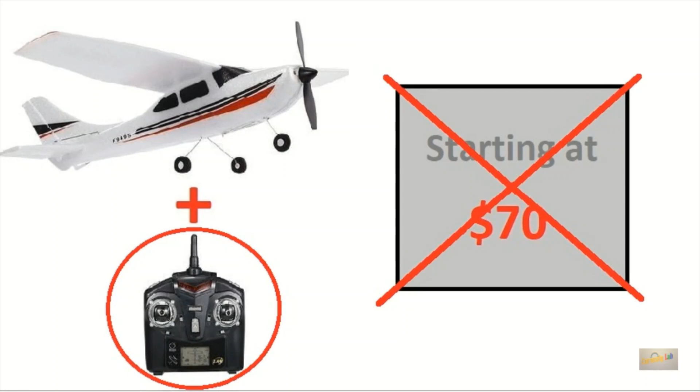If you try to buy the most affordable 4-channel RC plane, it starts around $70. Even making one is costly because of the price of remote control. But what if I tell you that you don't need to spend that amount of money on an RC plane?

It is possible to make a 4-channel RC plane for just $20, including remote controller. Can you imagine? We can get all necessary components required for an RC plane, including remote controller, in each and every cheap drone available easily for just $20. But the reality is, drone and RC plane are completely different things.

So you must be thinking, why should I convert a drone into an RC plane? And even if I want to, how can I do that? Let me answer these questions one by one.

First, why should we convert? You all will agree flying both drone and RC plane is great fun, but every individual has a different choice of hobby. So if you are an RC plane enthusiast like me, this can be really cost effective and great fun for you. We love experimenting with our hobby, and the design idea is so elegant that it's worth a shot.

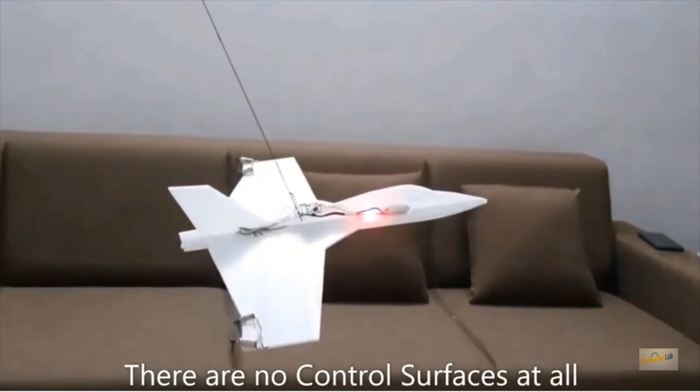While experimenting with my previous project, I got this unique idea of converting a cheap drone into an RC plane. Immediately, I tried my best to search if anyone had done this.

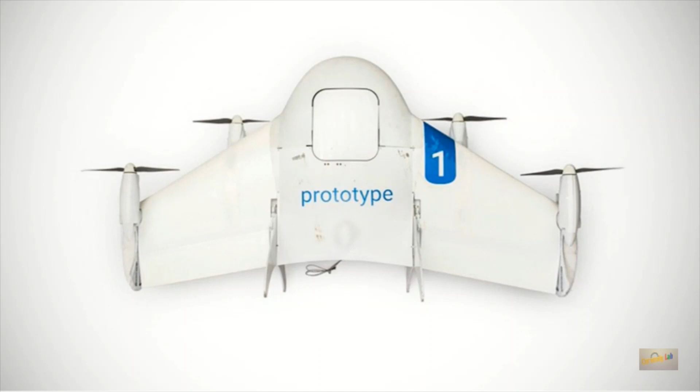Surprisingly, what I found is this Swan H-Wing and this Project Wing from Google use a similar design with VTOL capabilities, but they are entirely designed from zero with all necessary hardware and software, which is not an easy task for an individual hobbyist. Of course, some people have tried to convert a drone into a 2-channel RC plane, but nobody, literally nobody, has converted a drone into a 4-channel RC plane.

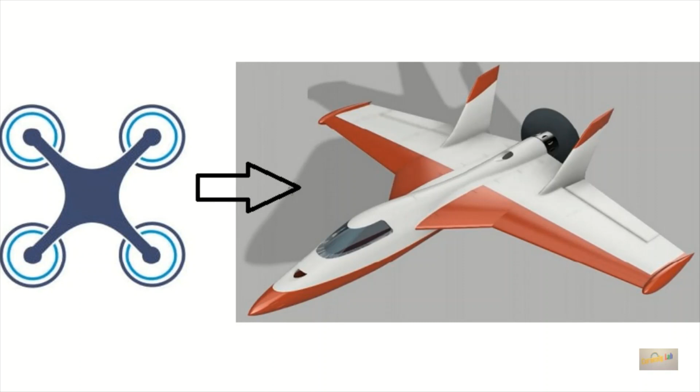Now, let's move to part 2, how to convert it. Let's begin with the basics of drone maneuvering briefly.

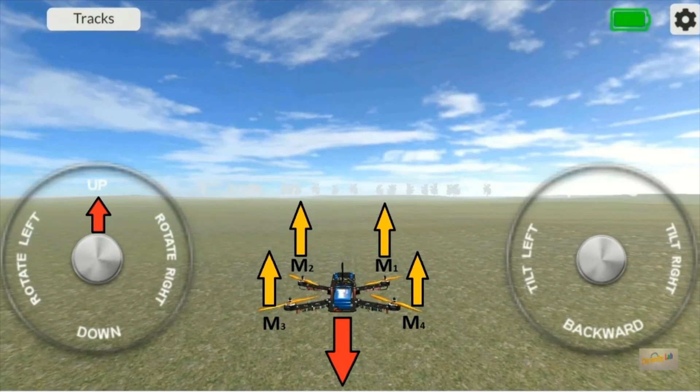When we move the throttle stick up, all four motors will increase thrust. As the total thrust is more than weight, the drone will start rising. Similarly, when we move the throttle stick down, all four motors will reduce thrust, and as the total thrust becomes less than weight, the drone will start descending.

When we move the pitch stick forward, the two rear motors M3 and M4 will produce more thrust than the two front motors M1 and M2, so the drone will pitch forward and also start moving forward. When we move the pitch stick backward, the two front motors M1 and M2 will produce more thrust than the two rear motors M3 and M4, so the drone will pitch backward and also start moving backward.

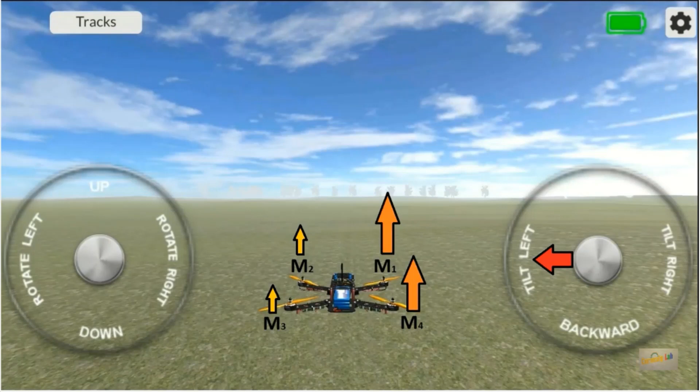When we move the roll stick left, the two right side motors M1 and M4 will produce more thrust than the two left side motors M2 and M3, so the drone will roll left as well as start moving left. When we move the roll stick right, the two left motors M2 and M3 will produce more thrust than the two right motors M1 and M4, causing the drone to roll right and move right.

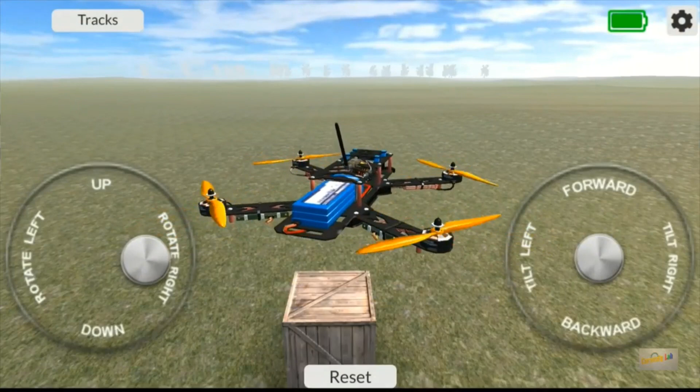When we move the yaw stick left, the two clockwise motors M2 and M4 will produce more thrust than the counterclockwise motors M1 and M3, so the drone will take a left turn due to counterclockwise unbalanced torque. When we move the yaw stick right, the counterclockwise motors M1 and M3 will produce more thrust than the clockwise motors M2 and M4, and the drone will take a right turn due to unbalanced clockwise torque.

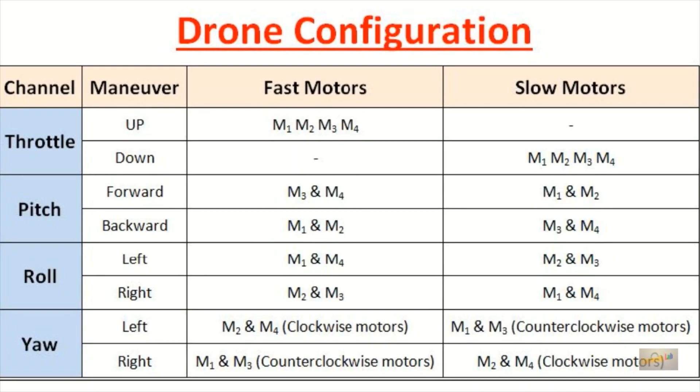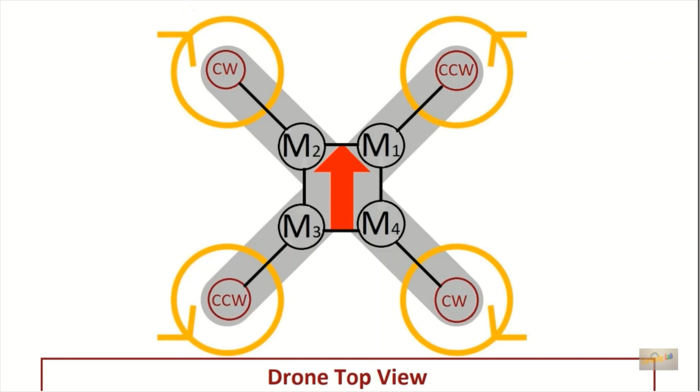This is the final concluding truth table for control inputs and respective motor outputs. I tried all combinations of motor configurations so that the same controls can be used for the RC plane also, and found this best suited configuration. This is how the motors are connected on the drone, where M1, M2, M3 and M4 are actually positions on the flight controller where motors are connected.

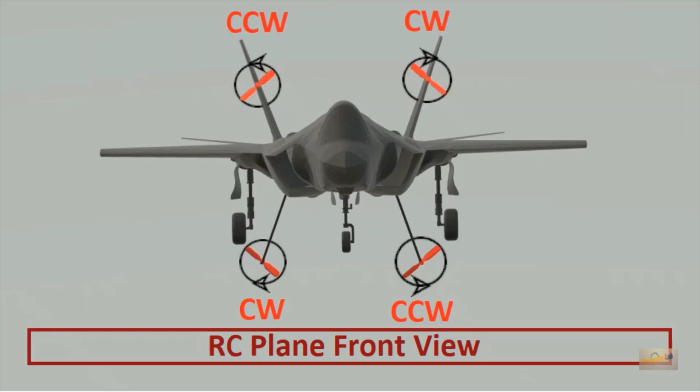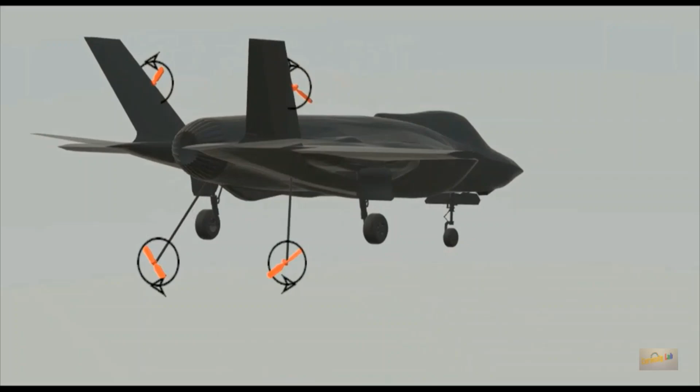Motors are mounted for horizontal thrust configuration, exactly as shown in this front view of the RC plane. But as you can see, motors are not exactly horizontal. They are at 20 to 30 degrees with horizontal to keep the line of action of thrust away from center of gravity, making controls more sensitive.

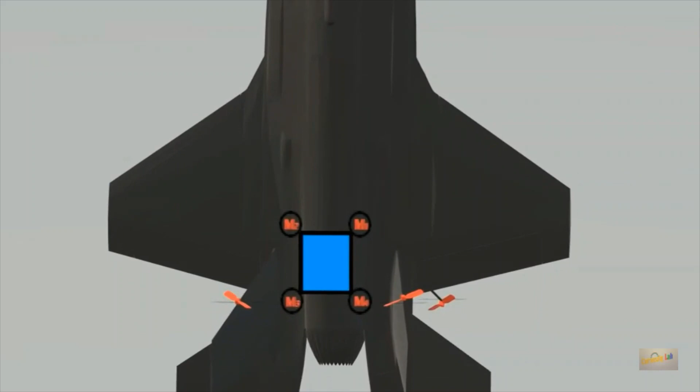Now let's install the flight controller on this plane. The flight controller from the drone is installed exactly the same way as the drone, perfectly parallel to the airplane fuselage. Now let's see the most important part, connections of motors with the flight controller.

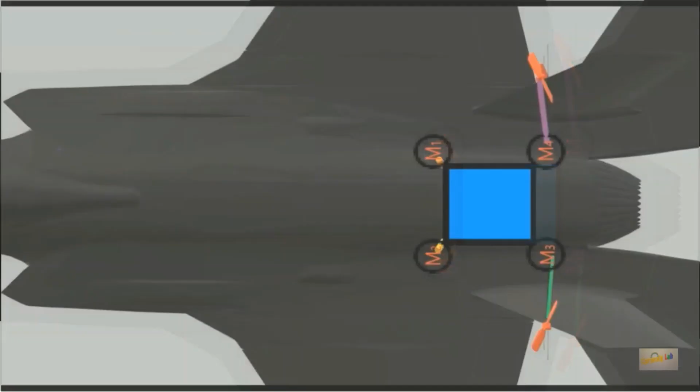Two upper motors on the airplane are connected to the flight controller where motors M3 and M4 were connected in the drone, as shown in the diagram. Now let's see the connection of the lower two motors with the flight controller.

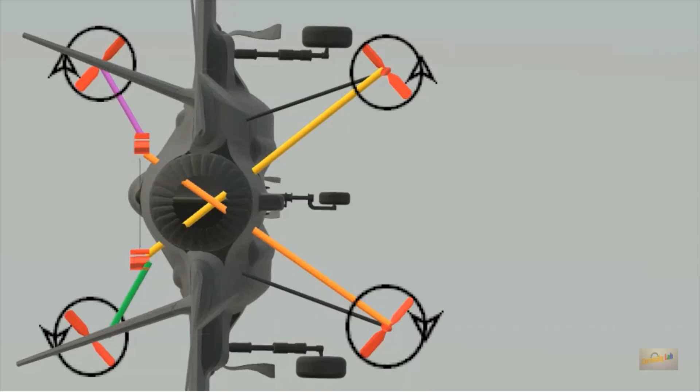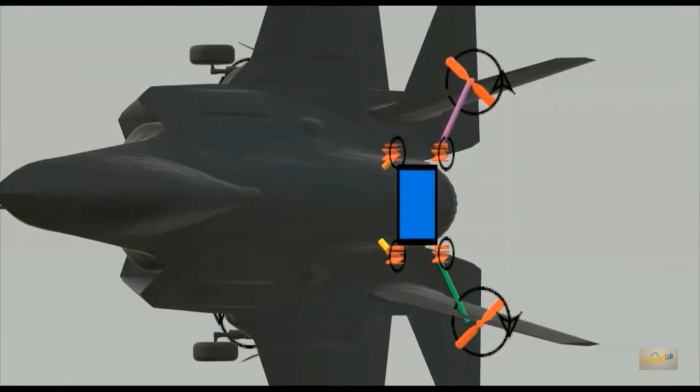Bottom left motor is connected on the right side of the flight controller where motor M1 was connected in the drone, and bottom right motor is connected on the left side of the flight controller where motor M2 was connected. Only this configuration will allow electronic gyro and manual controls to work efficiently for successful flight of the RC plane. Let's verify it.

In this configuration, the rotation and position of motors connected to M1, M2, M3 and M4 positions of the flight controller are changed. When we move the throttle stick up, as per this table, all motors will increase the thrust. Resultant thrust will be horizontal and in forward direction.

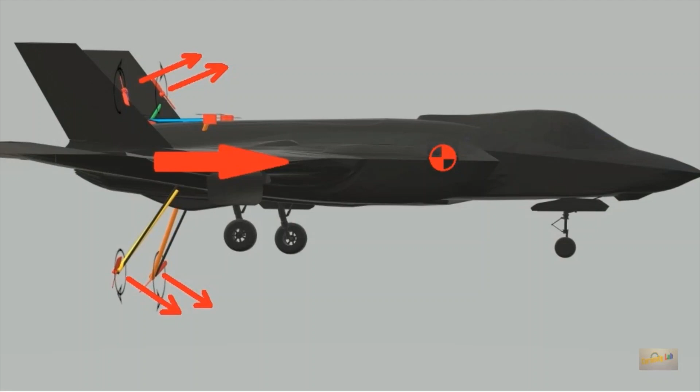So our RC plane will accelerate with increase in throttle input. And when we move the throttle stick down, as per this table, all four motors will reduce the thrust. So resultant horizontal thrust will reduce and our RC plane will decelerate with decrease in throttle input.

When we move the pitch stick forward, as per this truth table, motors M3 and M4 will produce more thrust than motors M1 and M2. Here we can see that the two motors on top are connected to positions M3 and M4. So these two motors on top will produce more thrust than the two motors at bottom. It will result in a torque due to which the airplane will nose down.

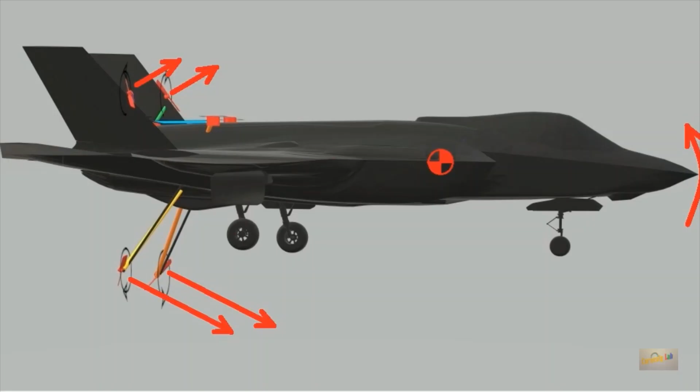When we move the pitch stick backward, as per this table, two motors at bottom, M1 and M2, will produce more thrust than two motors on top, M3 and M4, which will result in a torque due to which the airplane will nose up.

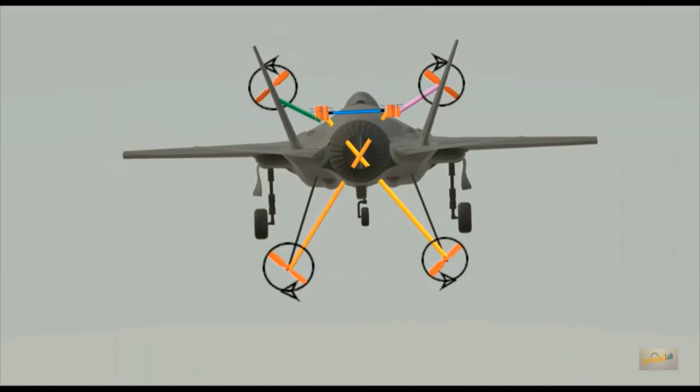When we move the roll stick left, motors M1 and M4 will produce more thrust than motors M2 and M3. Motor M4 is the top right motor and M1 is the bottom left motor. If we look from the rear, motors M1 and M4 are clockwise motors, so there will be a resultant counterclockwise torque on the airplane. Also, this torque will be enhanced due to the angles made by the motors with horizontal. This counterclockwise torque will make the airplane roll left.

Similarly, when we move the roll stick right, motors M2 and M3 will produce more thrust than motors M1 and M4. If we look from the rear side, motors M2 and M3 are counterclockwise motors, so there will be a resultant clockwise torque on the airplane. Due to this clockwise torque, the airplane will roll right.

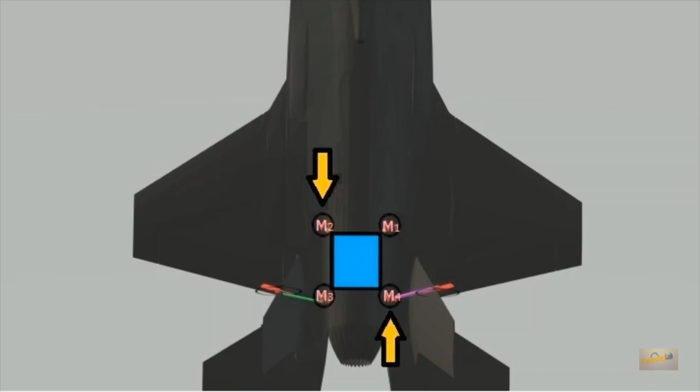When we move the yaw stick left, motors M2 and M4 will produce more thrust than motors M1 and M3. Motor M4 is the right side top motor and motor M2 is the right side bottom motor. Here, both right side motors M2 and M4 are producing more thrust than both left side motors, due to which the airplane will take a left turn.

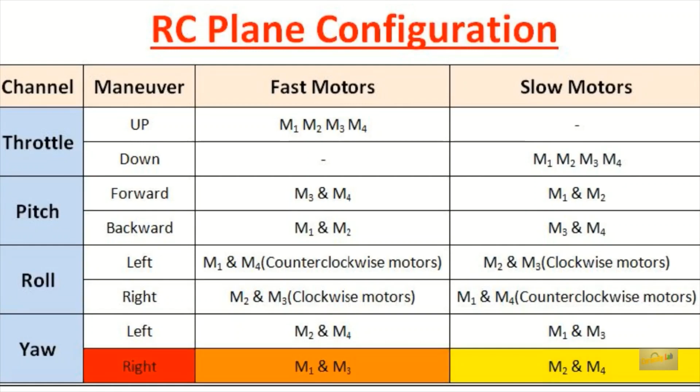Similarly, when we move the yaw stick right, motors M1 and M3 will produce more thrust than motors M2 and M4. Here, both left side motors M1 and M3 are producing more thrust than both right side motors, due to which the airplane will take a right turn.

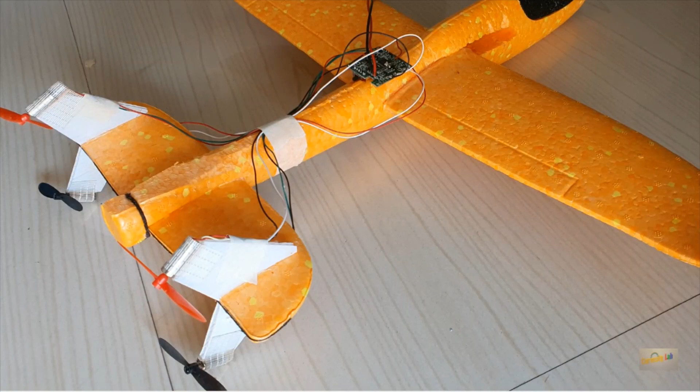A small note: if the drone you want to convert has geared propellers, you have to replace them with direct drive propellers to achieve speed more than the stall speed of the RC plane. Here is the prototype, so let's see the proof that this idea works.